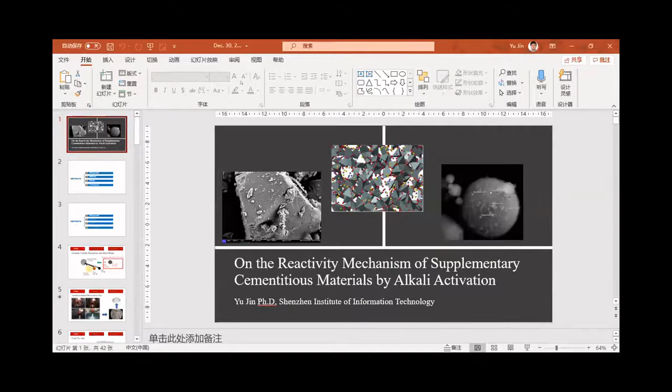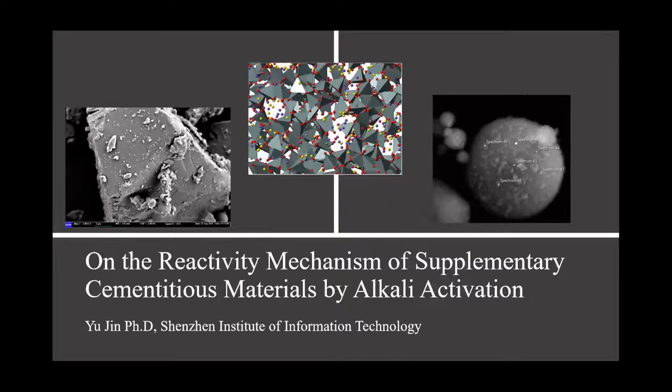Yes, okay good. Today my topic is about the reactivity mechanism of supplementary cementitious materials by alkali activation. Supplementary cementitious materials are not very new in concrete technology, but its reactivity mechanism is so far not well understood. So my study is on the mechanism of this SCM.

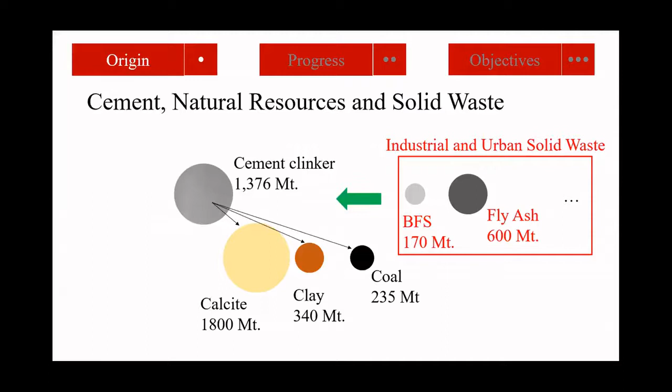This presentation will be delivered in four sections. First, I will introduce the background and the method I use in my research, then some results, followed by conclusions. In the first part, I will shortly give the background about the use of SCM.

As we all know, cement production generates quite a lot of CO2. In addition to environmental impact, there's also natural resource consumption. For example, this is data from 2017 in China: the cement product clinker produced was 1,376 million tons—a huge amount—and it consumed about 1.8 billion tons calcite and 340 million tons clay, also coal. So we cannot continue with such high natural resource consumption.

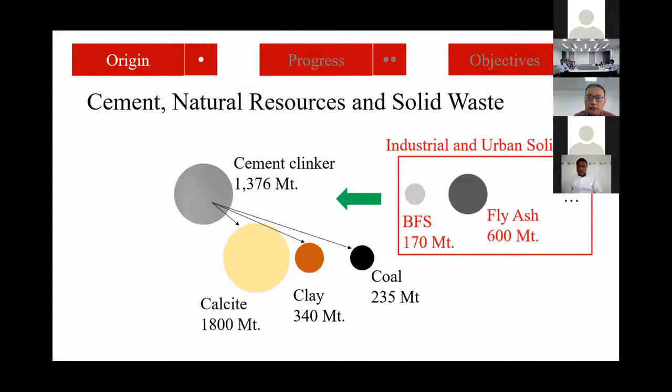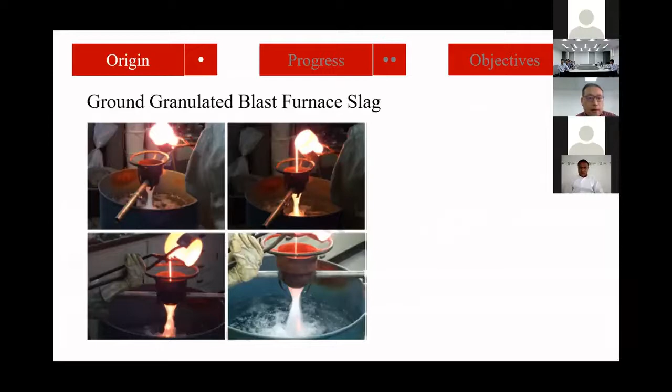In this way, many industrial and urban solid wastes will be added in cement production, such as blast furnace slag and fly ash. In this research I will focus on blast furnace slag and fly ash because they show some similarities. Blast furnace slag is a byproduct from steel making—the molten slag is water quenched and ground into powder. I will just call it slag for short.

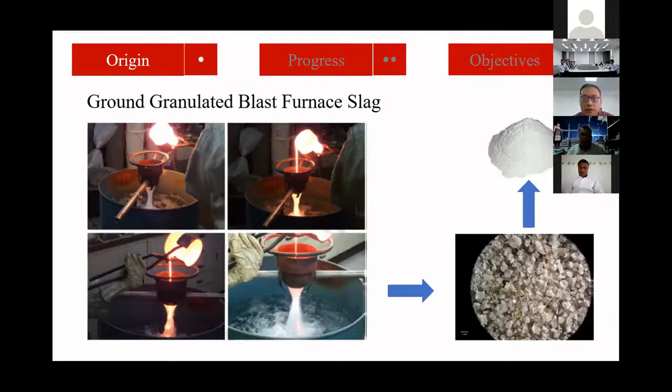Coal fly ash is also a byproduct from coal combustion. Organic matter is burned out, and the minerals are transformed into a glassy state or other crystals at very high temperature. This complicated process makes the coal fly ash's microstructure very complicated.

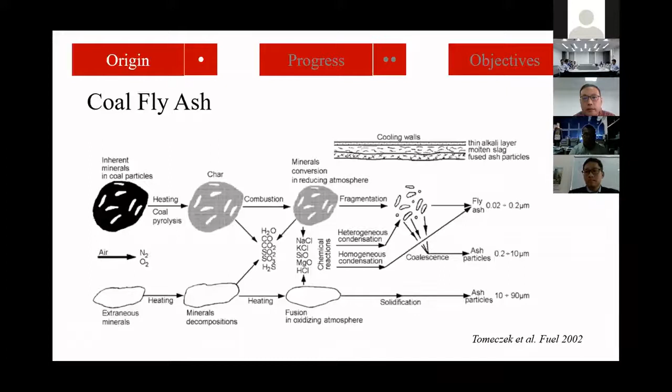For SCMs like blast furnace slag and fly ash, they show basic similarities. The most reactive component of these two SCMs is the glass phase. For slag, more than 90 or 95% of the component is glassy phase, but for fly ash it ranges from 50% to 90%, depending on the coal mineral or the heating history. So in general, they share a kind of glass structure.

The glass is made of the so-called network former—the tetrahedron of silicon tetroxide or aluminum tetroxide. This connected network is also modified by the so-called network modifier, or alkali cations, like calcium, sodium, or potassium, and these alkali cations will break down the connected network and increase the reactivity of the SCMs.

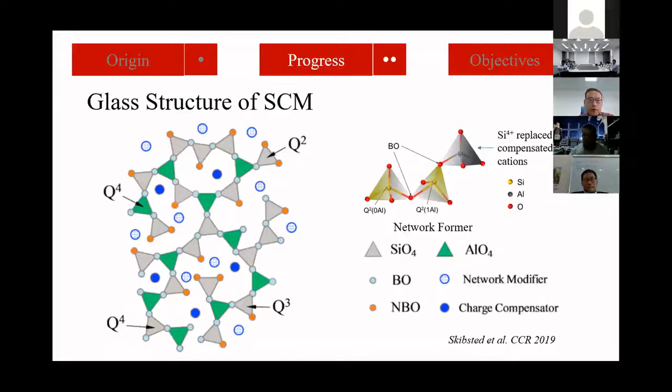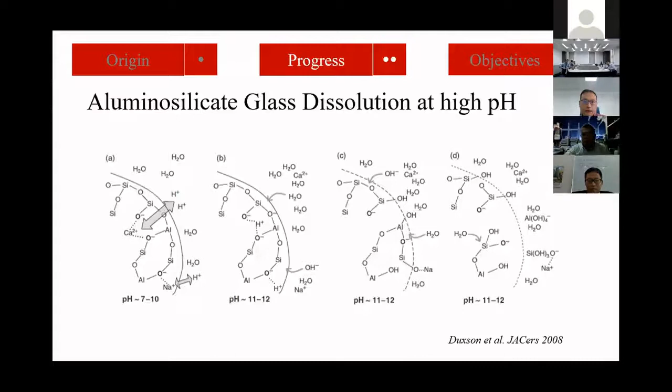Recent studies give some examples. Because the aluminosilicate glass dissolves at high pH, this is the general idea of how it dissolves in high pH solutions. First, the cations exchange with hydrogen in the aqueous phase, and water or hydroxide will attack the aluminosilicon oxide bonding. This silicate or aluminate hydrate is released from the glass into the alkaline solution, and the solution is further controlled by the dissolution-precipitation process and forms hydrates.

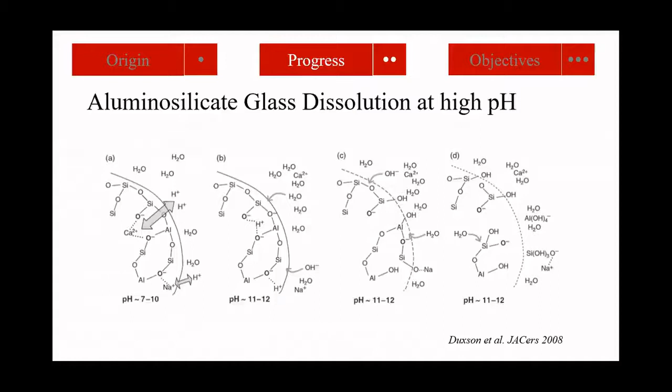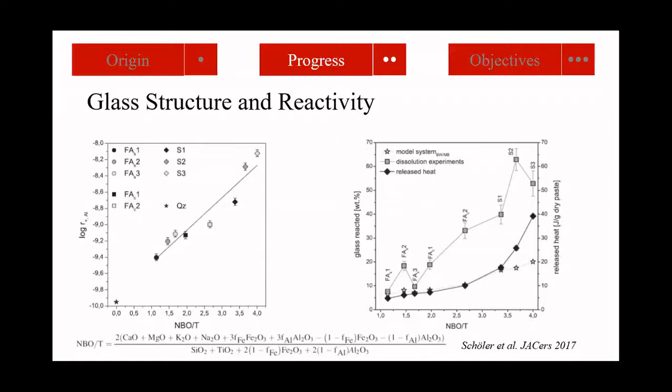This is the general steps for glass dissolution at high pH, and this glass structure shows the non-bridging oxygen per tetrahedron, or NBO per T. This parameter can be used as an index to indicate reactivity—for example, the dissolution of silicon in the alkaline solution, the glass reacted, and the heat released. All these parameters can be correlated with this NBO per T parameter, so it's well used to quantitatively determine the reactivity of SCM.

Also, it's not only used in the pure system, but also for SCM—for example, fly ash blended with cement—also shows the power of these parameters. This network ratio is just another name of the NBO per T, and it gives a very good correlation between this ratio and the heat release, in other words the reactivity of the fly ashes, no matter the glass content or other chemical composition—just related to these parameters.

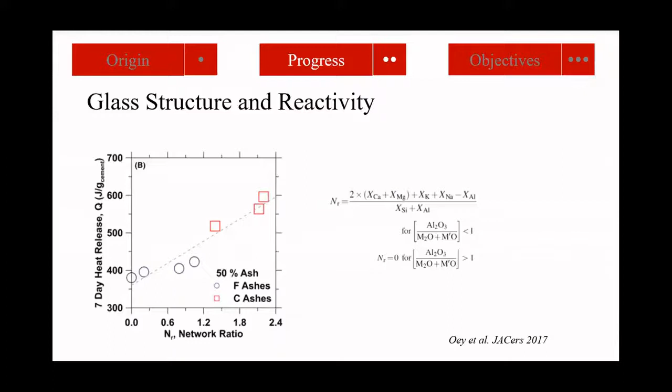In my research, I would like to further explore some questions left. For example, the first is, we know the glass structure of slag and fly ash in general, but what's the difference? And can the correlation between the glass structure and the reactivity be exactly defined by this NBO per T parameter, or is there something else?

Also the reactivity under various alkali conditions, because we know it's a solution-controlled process for the hydration of SCM. So this research will go on these three aspects.

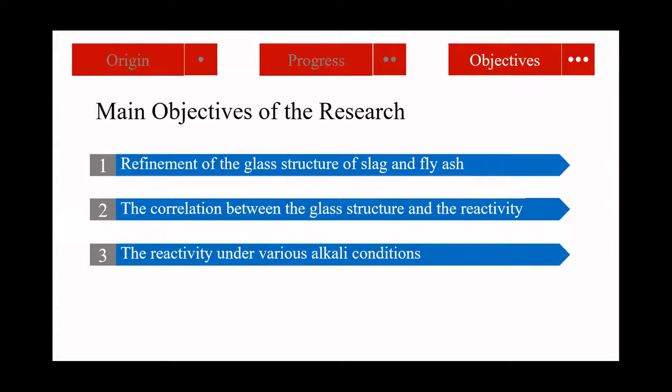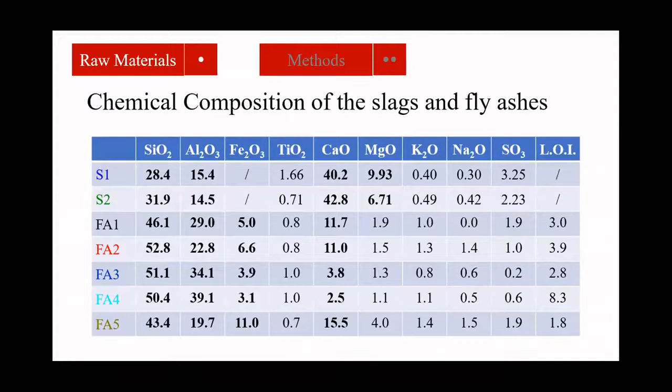I will skip the introduction of the chemical composition, but in general there are very typical chemical compositions for slag and fly ashes. The particle size for slag, the D50 particle size, is around 10 to 20 micrometers, quite typical. For fly ashes, the particle size is more coarse, around more than 30 or 50 micrometers in D50.

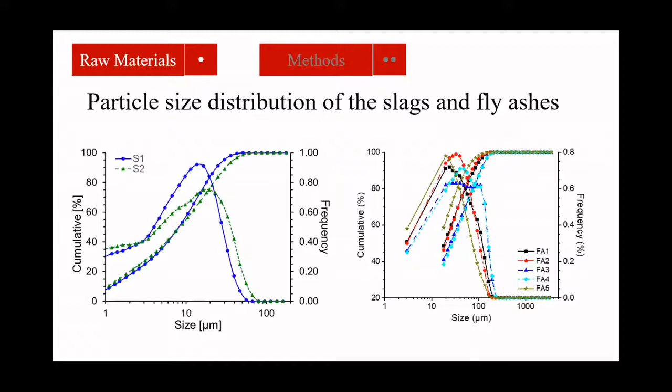I also use different alkaline solutions to activate the SCMs. For this pure system, it's easier to explore its mechanism, using a water/slag ratio and water/fly ash ratio of 0.45 and 0.4.

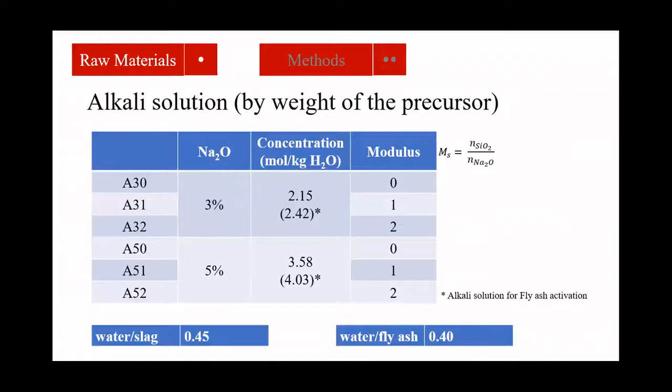For the characterization method, firstly I use quantitative X-ray diffraction to determine the glass content in the fly ash, and also quantitatively determine the glass phase and the crystal phases.

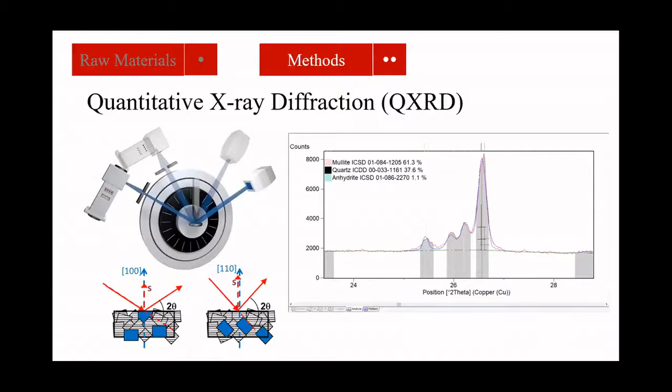For example, around 80 to 40 ppm, aluminum is tetrahedrally coordinated, and around 0 to 20 ppm it is 6-coordinated.

In this research, I also use energy dispersive X-ray spectroscopy to determine the chemical or elemental mapping and elemental distribution in the alkali-activated materials. Using this method, coupled with some image processing, we can determine the degree of hydration, for example, of slags in this case.

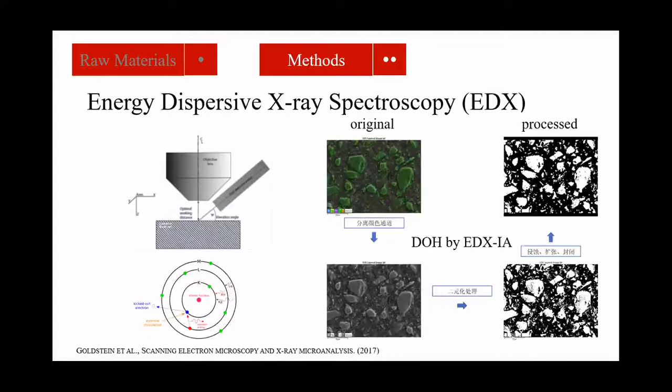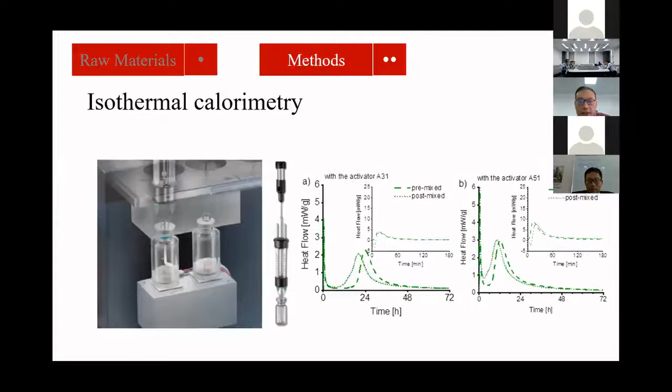For reactivity, we all know that isothermal calorimetry is a good method, and it can be used to indicate reactivity, especially in reaction kinetics. In this study, I use the cumulative heat as an index to evaluate the reactivity of SCM over a given time duration. Now I will go to my results.

The first result is about the spatial distribution of main elements in the slags. From the production of the slag, we know it's in a molten state, and this molten state can be regarded as homogeneous. From our results, either from X-ray fluorescence, which gives the chemical composition of the slag in general, or from EDX spots, the chemical composition of individual small scales was determined.

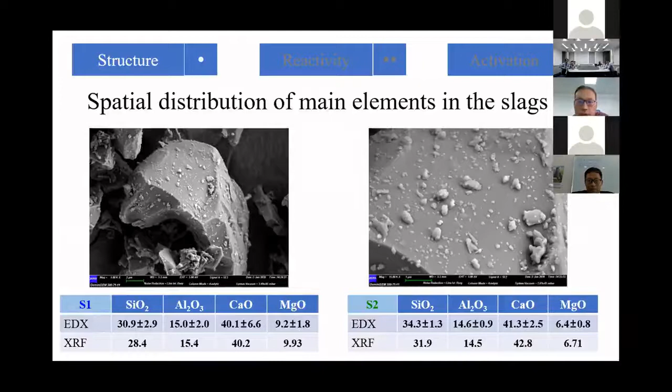Compared with these two methods, we can find both methods give very similar results. So it means that the chemical or main element distribution is quite homogeneous in slags.

Further, in the background section, we introduced the glass structure of SCM, and for this kind of glass structure, we can further determine its connection state using a model. I will not give full detail in this presentation, but if you are interested in the model, you can refer to my publication in CCR, which was published in 2019.

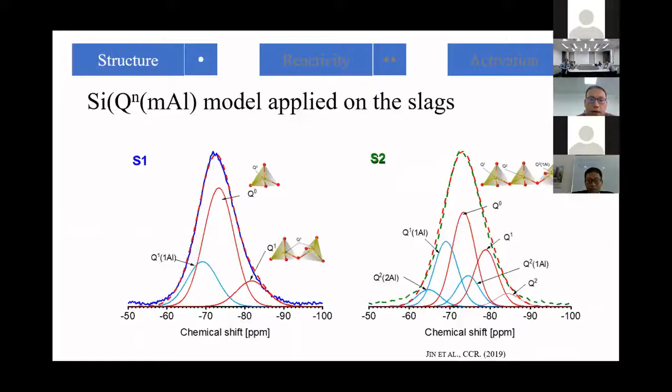In this model, we could see the differences between these two slags. For slag S1, it shows a very high depolymerized degree, meaning there are a lot of monosilicate species that can be easily released during alkali activation. For slag S2, its polymerized state is much more complicated, meaning its dissolution and release into the alkaline solution is more complicated than S1.

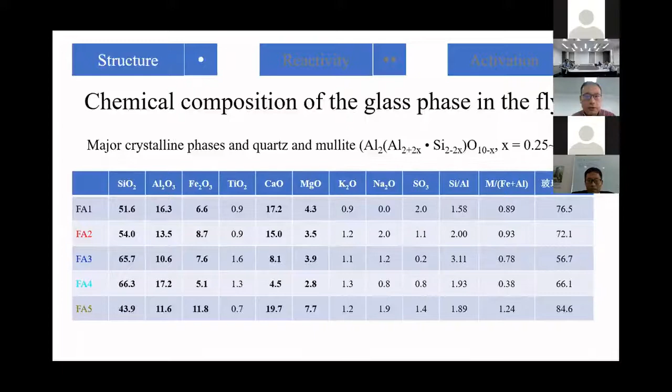The other SCM is fly ash, which shows major crystalline phases of quartz and mullite, though mullite is just a general description. Different fly ashes have different chemical compositions and structures, and the glass content of these fly ashes ranges from 56 to about 85%. From this glass chemical composition, it can be seen that it consists mainly of silicon and aluminum with a small amount of calcium, magnesium, and other alkali cations.

For the spatial distribution of these main elements in the fly ashes, it's totally heterogeneous. Chemical elements distributed in these slag spheres show no homogeneous structure; it's totally heterogeneous.

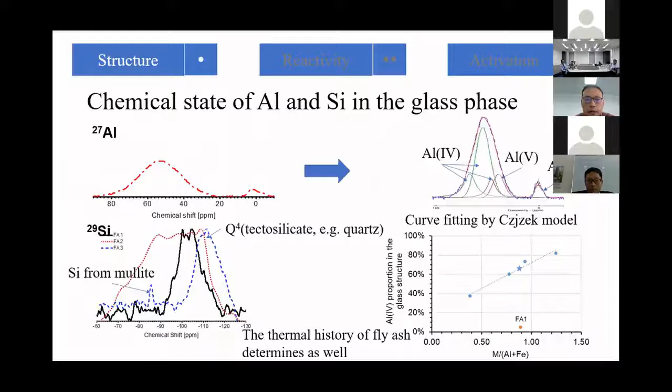From its aluminum and silicon state in the glassy phase, using some curve fitting method with a Czjzek model, we can see that for the fly ashes, the major aluminum coordination status is tetrahedral coordination, and only a small amount of this fly ash is... sorry, I made some wrong mark.

It's 6 coordinated, and from the ratio between the alkali cations and aluminum and iron contents, we could also speculate the 4 coordinated aluminum proportion in the glass structure. Also from the silicon state, we could see the silicon from mullite and also from tectosilicate, either from the crystalline phase like quartz or from the glassy phase.

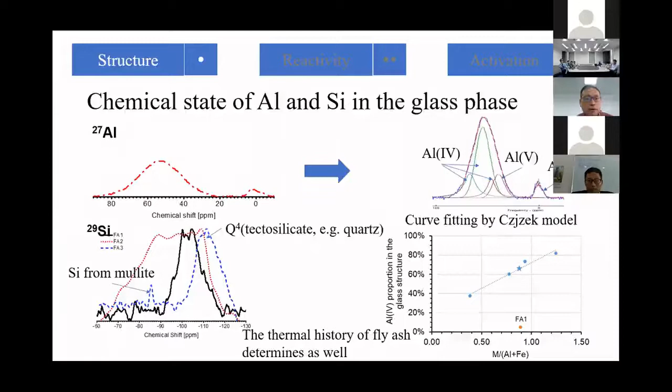Based on these chemical environments, we could give a model to describe the glass structure of this ash. It can be simply ascribed as 3 different part glasses. The first part is the per-alkaline aluminosilicate glass. The structure is similar with that in slag.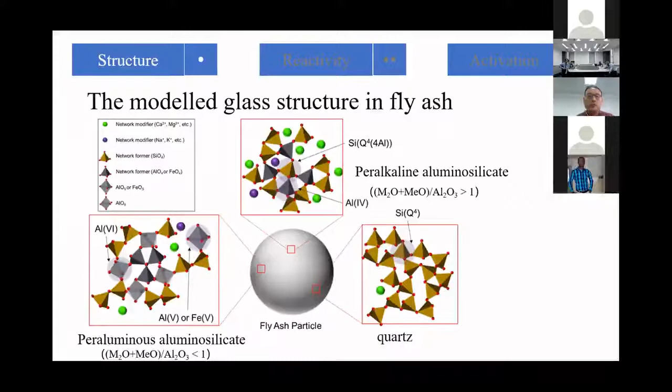This is the most reactive part of the glassy phase. The second glassy phase is the so-called peraluminous aluminosilicate, where aluminum is 5 or 6 coordinated because it's lacking cations in these structures, and this reactivity is weaker than peralkaline aluminosilicate. The third kind of glass structure is quartz-like glass structure, and for this one, the reactivity is quite low.

For the reactivity, we also use the so-called non-bridging oxygen per tetrahedral parameter to indicate its reactivity, but different from what was described previously, we include the sodium and also the silicon from the activator. We call this a pseudo or non-bridging oxygen per tetrahedron parameter.

Using this parameter, we correlate it with the cumulative heat under 24 hours or after 72 hours, and we could find a very linear correlation between this parameter and the heat released.

Unfortunately, in the presence of the silicate, the correlation is not as good. It means that in the presence of the silicate, the reactivity of this SCM is not only controlled or dominated by the dissolution of the glass, but also by the reaction products which impede or influence the reaction of the SCMs.

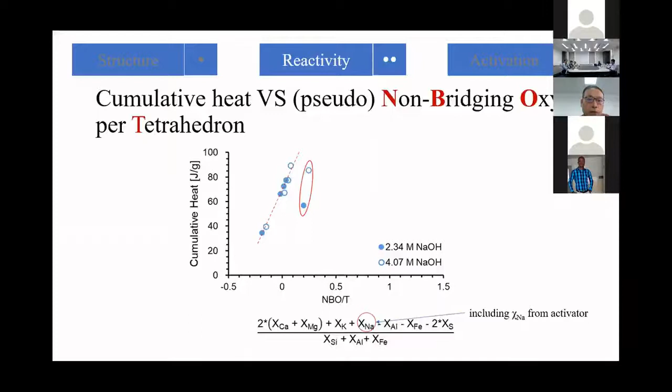In other words, for this kind of fly ash, it makes no sense to increase the alkalinity since its reactivity is quite low. It cannot be enhanced by alkaline solutions alone. For this kind of fly ash, it's suggested to use, for example, elevated temperatures to increase its reactivity.

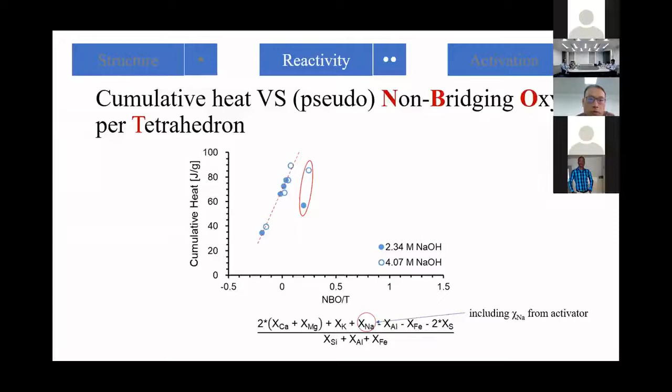In this section, I will give just the alkali activation mechanism of slag, because as introduced before, slag is much simpler than fly ash. So in this part, only slag is discussed.

First, I look at the degree of hydration of these alkali activated slags under different activation conditions, using different alkali concentrations and also silicate concentrations. It's denoted as two numbers. The first number is the weight percent or concentration of the alkali. The second number denotes the silicate modulus. For 0, it means there's no silicate from the activator.

From this degree of hydration analysis, we found there's no clear trend, but in general, with the increase of silicate concentration, the degree of hydration of the slags decreased, and the difference between these two slags is not very obvious to observe.

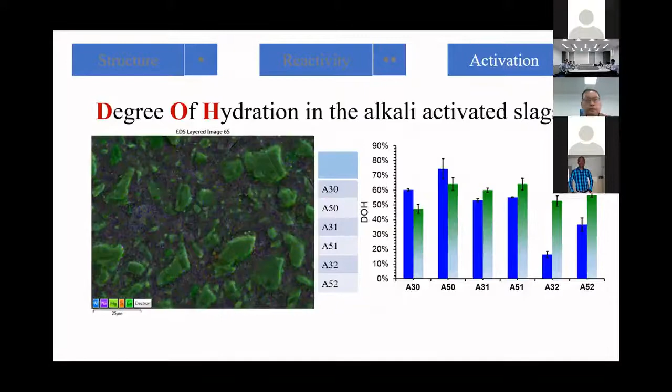If we present the degree of hydration against the pseudo non-bridging oxygen per tetrahedron parameter, we could see it correlates well with the alkali activated slag made of S1, but it's not so good with that made of slag S2.

If we plot this degree of hydration against the cumulative heat, it shows a relatively good correlation, meaning this degree of hydration makes sense since it correlates well with the cumulative heat. But our parameter used to describe the degree of hydration works not very well.

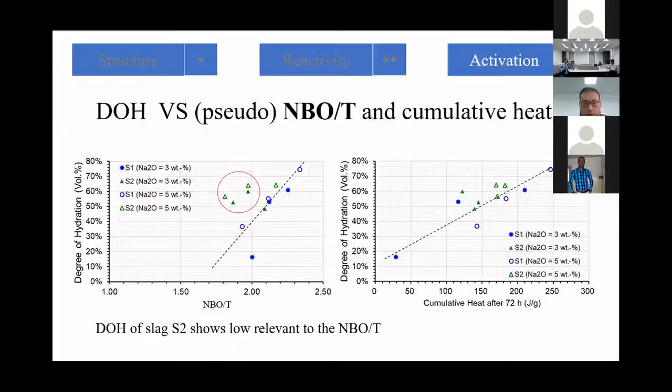This again indicates that in the presence of the silicate activator, it will influence the degree of hydration not just through dissolution, but also through the reaction products.

In this EDX mapping method, we also found some phenomena where some slag particles show silicon-rich regions. We call it silicon-rich slag particle. The volume percentage of this silicon-rich slag particle is correlated with the alkali activation condition. Generally, with the increase of silicate concentration, the volume percentage of silicon-rich slag particle increases.

It's reasonable because if the solution is saturated with silicate anions, the dissolution of silicate from the glass phase will be inhibited.

We also found a very distinct difference in the volume percentage of silicon-rich slag particles between these two slags. Slag S2 always shows a higher volume percentage.

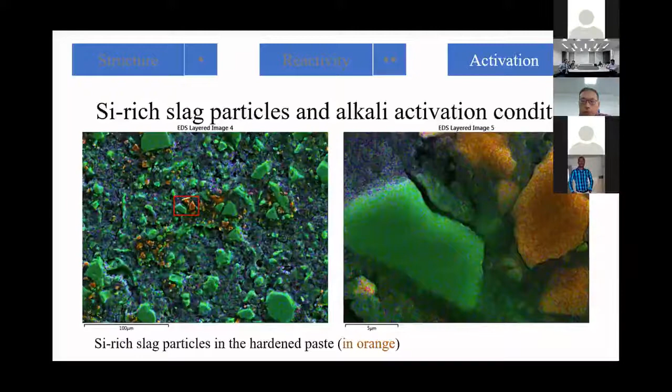This is an enlarged image. You could see that quite a lot of silicon species deposit on top of or on the surface of the slag particles. We further examine secondary electron images to see the details of these particles, to see if there are visible hydration products or not.

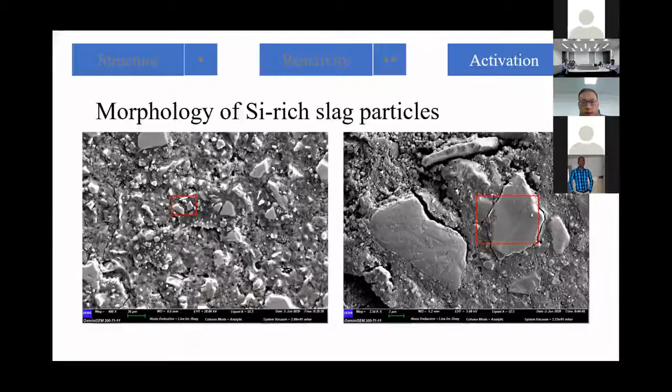From these high resolution images, we cannot really observe reaction products. Instead, we see some very typical features, which indicate the dissolution of the glass phase.

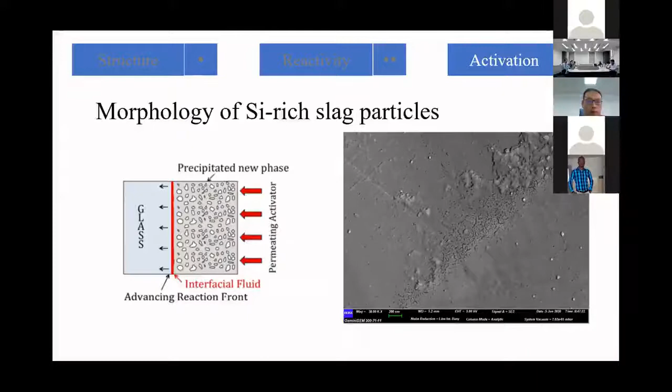Actually, for this glass reaction in aqueous solution, there are two models. The first is the so-called leach layer model, which I will not introduce here. The other is the so-called precipitation dissolution reprecipitation model.

Within this model, the reaction front moves on as glass dissolves and precipitates a new phase, then interfacial fluid moves on to interact with the glass surface, and the reaction front moves on. This dissolution precipitation mechanism can explain the silicon-rich particle phenomenon, because if the leach layer model dominates, it would not produce such silicon-rich particles.

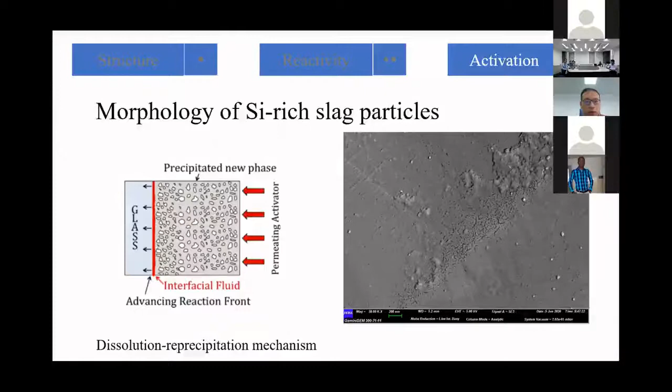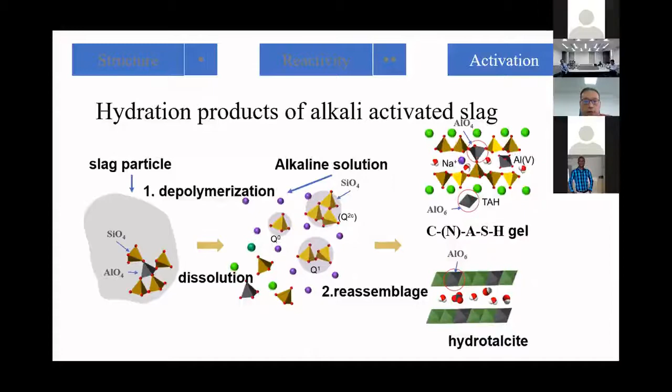For the alkali activated slag, this reaction can be simply expressed in this schematic illustration, and these two major hydration products are the so-called C-A-S-H gel and hydrotalcite. These two hydration products may indicate how the alkali conditions influence the reactivity of the slag.

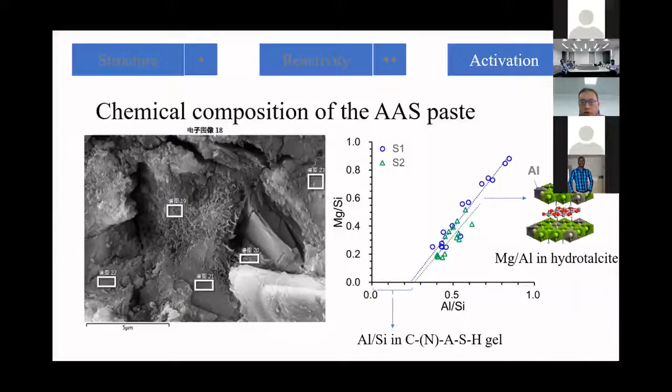This is the result. Normally, the magnesium-alumina ratio in hydrotalcite ranges from 2 to 5, but our results show that most of the magnesium-alumina ratio is below 2. The aluminum-silicon ratio we determined is mostly above 0.19, and actually the saturated aluminum-silicon ratio in C-A-S-H gel is limited to 0.19.

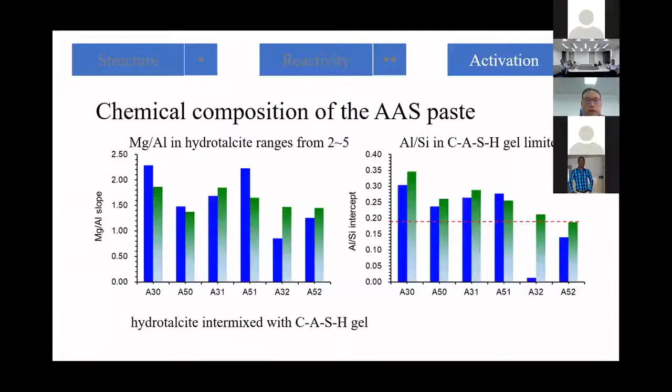So it means that what we speculated from the plot either underestimated the magnesium-alumina ratio in hydrotalcite, or overestimated the aluminum-silicon ratio in C-A-S-H gel. These results indicate that hydrotalcite is intermixed with the C-A-S-H gel, and we cannot easily distinguish these two hydration products in hydrated pastes.

This 6-coordinated ratio in the paste can be further deconvoluted into different hydration phases like AFm, but it's just in small amount. Also, hydrotalcite is the main alumina-containing hydration product, and so-called third aluminate hydrate. This third aluminate hydrate is actually not a new hydration product—it's a misunderstanding previously, and actually it's the 6-coordinated alumina in the C-A-S-H gel structure.

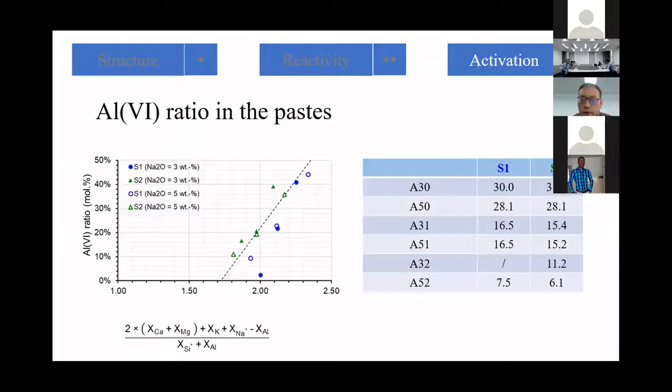From this deconvolution, we could get a ratio of hydrotalcite in hydrated paste, and from the result, we could see clearly that silicate concentration is determinative for the formation of hydrotalcite. The formation of hydrotalcite solely or nearly only depends on the silicate concentration.

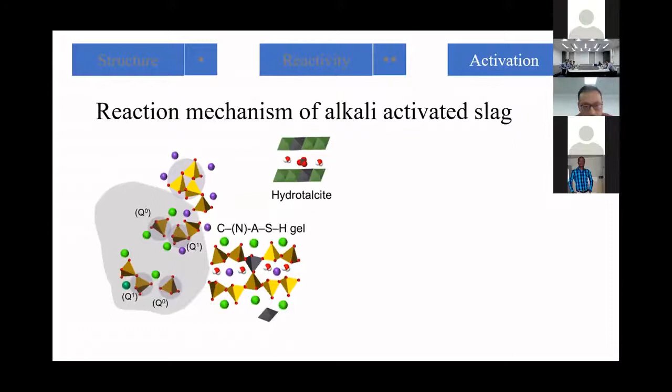By the results obtained so far, we could propose a reaction mechanism of alkali activated slag. First, if silicate anions are present in the activator solution, they can react immediately with the species dissolved from the SCM, or here slag particles, and form C-A-S-H gel and hydrotalcite.

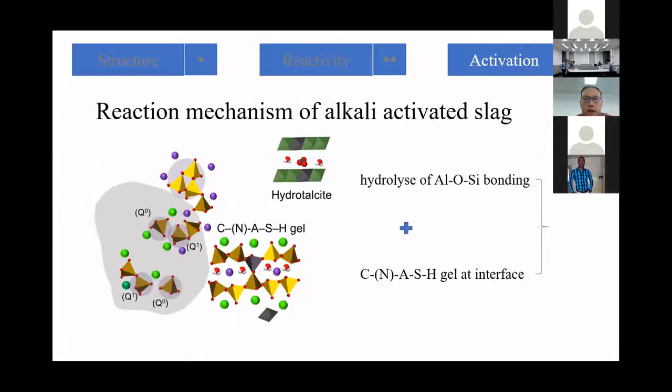The formed C-A-S-H gel, especially when the initial silicate concentration is very high, will impede the further reaction or further dissolution of the slag particles, and in this sense, the reactivity of the slag particles is low. So for the reactivity of slag by alkali activation, the hydrolysis of aluminum-oxygen-silicon bonding, or the depolymerization of the glass network, is as important as the formation of the C-A-S-H gel interface. Both factors determine the reactivity of slag by alkali activation.

In the end, we go to my conclusion. The glass structure in slag and fly ash is mainly aluminosilicate, which was modeled by different models depending on the content of alkali cations. For fly ash, thermal history plays an important role in the structure as well.

Despite that, the reactivity of both slag and fly ash by alkali activation can be linearly correlated to the depolymerization degree of the glass structure, even for fly ash, at ambient temperature—if the temperature raises, this correlation may not apply. The correlation can also be extended to alkali activation systems in the absence of silicate ions, and for SCMs used, for example, in cement, where silicate concentration is very low, so the reactivity of slag and fly ash can be simply correlated to the depolymerization degree of their glass phases.

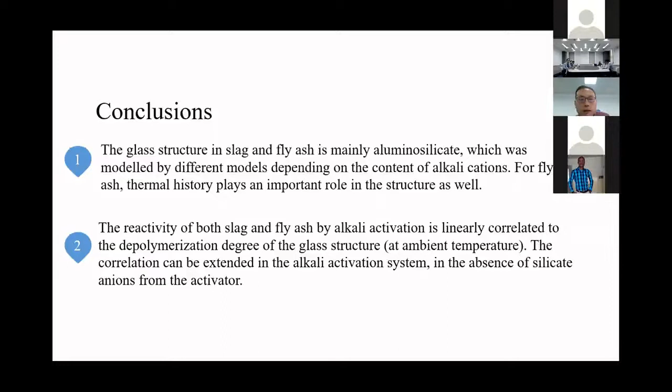The depolymerization degree of the glass structure determines the fate of aluminum, including the precipitation of hydrotalcite and the incorporation in C-A-S-H gel. The hydrolysis of the aluminum-oxygen-silicon bonding in the glass structure of slag is key for the reactivity, but also the formation of C-A-S-H gel in the vicinity of the slag particles determines the dissolution of the aluminosilicate glass as well. Both factors matter with respect to slag reactivity by alkali activation.

But in the case of cement blends, for slag its reactivity is majorly controlled by the glass dissolution of the slag. Of course, the formation of this C-A-S-H gel on the surface of the slag particles will also have an effect on its continuous dissolution, and this will be researched later.

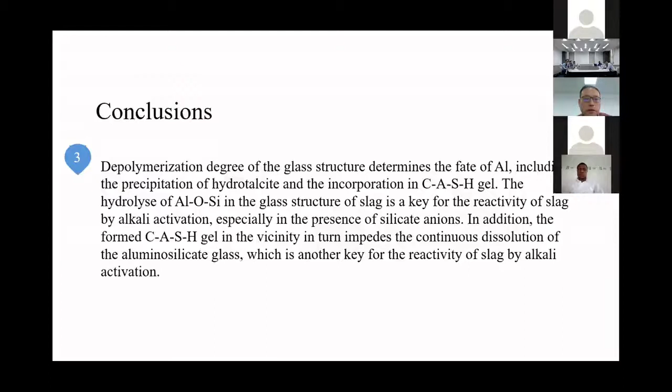Okay, this is the end of my presentation. Thank you very much for your attention.

Thank you very much, Dr. Eugene, about this very interesting...